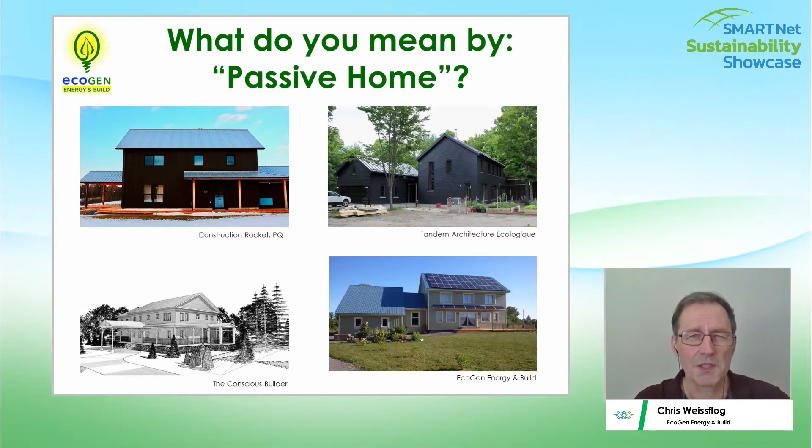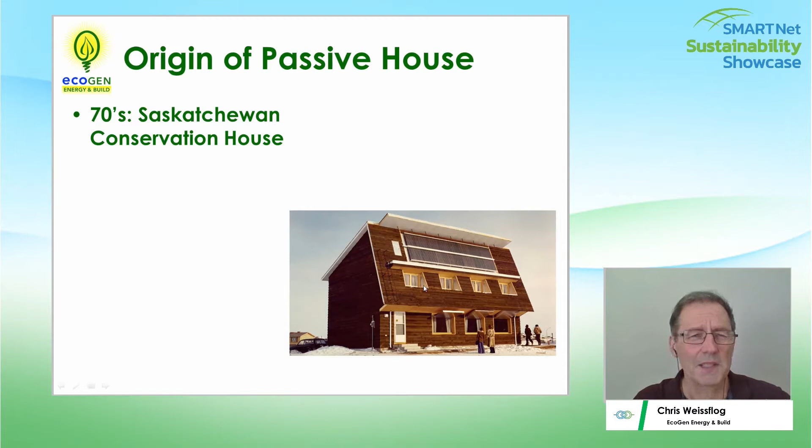Then in the 80s and 90s, Dr. Wolfgang Feist took over, really advanced the concept. He put it into a formula, standards that you had to achieve in terms of energy intensity, how many kilowatt hours of energy per square meter were used or per square foot in order to get through a complete year. So it's all based on an annual basis, as well as instantaneous the demand at a given time.

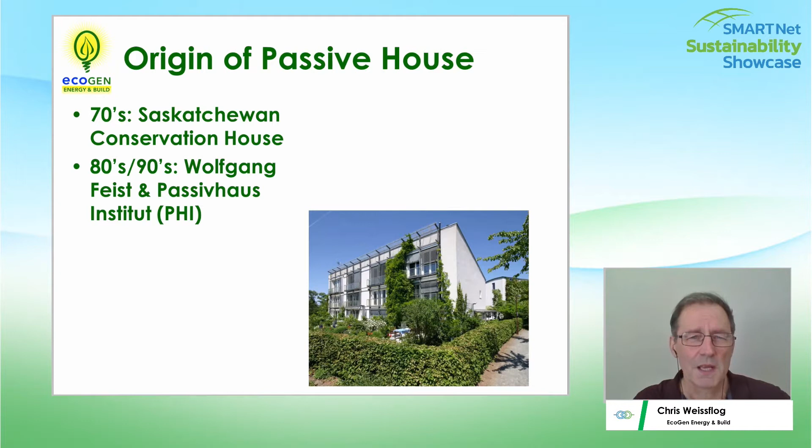So there are a lot of limitations set on it, but the idea was that we can get the amount of energy needed for a house or a building down to a very small amount in order to reduce the amount of energy consumed and reduce the carbon emissions, make our buildings more sustainable from an energy perspective. That concept made its way to North America and got institutionalized in the US via the work that Katrin Klingenberg and a number of other enthusiasts in the US had adopted it and began disseminating the German standard.

Unfortunately, I would say fortunately, they discovered that the standard was difficult to apply cost effectively all across the various climate zones in the United States. We have some really cold climate and dry up in Alaska, and some very hot and humid climates down in, let's say, Florida and Georgia, and everything in between.

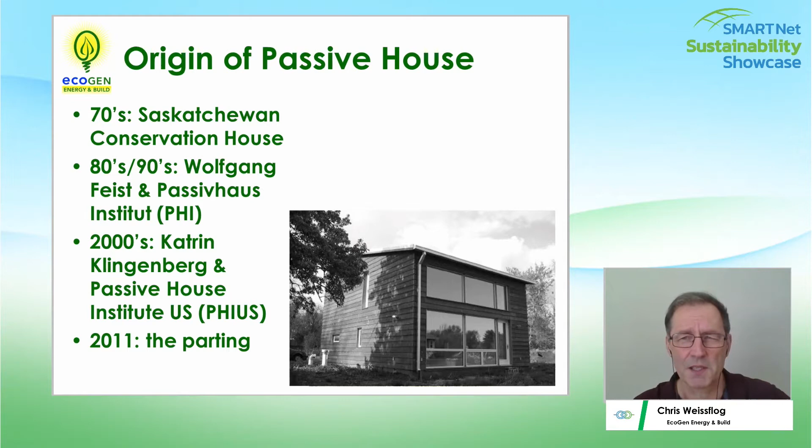So with all the different climate zones, they realized that if you were going to slavishly follow one standard, you might be spending a lot of money on one area when you could be spending it somewhere else, and yet achieving the same amount of energy intensity at the end of the day. So there was a parting of ways. I won't get into it, but what I can tell you is that from a fundamental perspective, they both agree that how you achieve high levels of energy efficiency is like this.

First of all, we got the thermal barrier, that's this insulation, keep the heat in, keep the heat out. Make it really airtight so that air and moisture don't work their way into the walls, but you don't lose air and the heat that goes with it, or the coolness that goes with it if you're in a hot climate. You optimize the amount of sunlight you get during the summer and winter. As you can see here, when the sun is low on the horizon in the winter, we can use the heat. We have good shading, keeps it out in the summertime.

And of course, once you make your envelope really airtight, which you must do in order to prevent the air getting in and out, you bring in lots of fresh air and you recover the heat on the way out by giving the heat to the air coming in with a high efficiency ventilation machine. And lastly, you make up the heat with a small device.

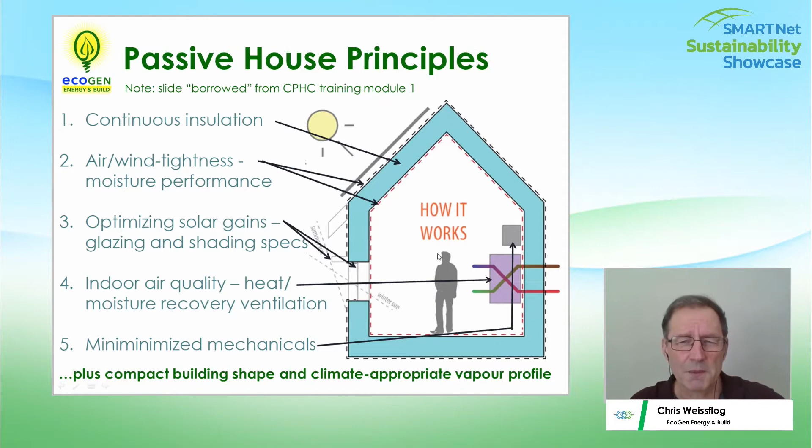And I would tell you that in a case of homes that we've been building, 2,000 square feet, 3,000 square feet, about 2 to 3 hair dryers on the coldest night of the year. That's the amount of heat that we need to keep it going. In fact, we have a hard time finding heat pumps that are small enough.

So what does it look like? Well, you've seen the pictures, but it's not so much what they look like, it's what they feel like that's important. It's all about comfort at the end of the day. And of course, the more efficient you become, the more comfortable they are. And I would say that comfort has a number of dimensions.

In particular, the ones I want to draw attention to are thermal comfort, which of course we're used to because we have wide ranges of temperature here, plus 30 in the summer, minus 30 in the winter time. Yet here I am in short sleeve shirts, and in my house I haven't had the heat on in 2-3 days now. In fact, I'm cooling the house right now and making hot water at the same time. More about that later.

But this is the kind of weather that my house likes. Sunny, because we do have some passive gain, and cold, because then the amount that we're losing heat, we're kind of gaining it up at the same rate. So comfort: thermal comfort, we have humidity comfort, always keeping the humidity in the right range between 40 and 60% relative humidity. Indoor air quality, I mentioned the ventilation systems.

So passive houses, because they have to be well ventilated, bring you fresh air all the time, get rid of the stale, humid, or toxic airs. I wouldn't say toxic, but you know what I mean. Airs you don't want to have in your house. And acoustic: with the thick walls and the right insulation you can achieve a high degree of acoustic comfort here. I'm only 100 feet from the road, and the only thing I hear are the Harleys that drive by and the big transport trucks and the knobbly tires. And even then it's small.

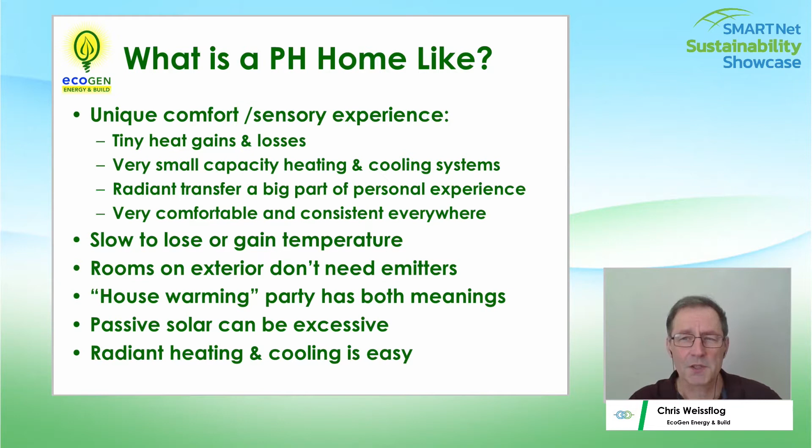And of course, the energy bills that go with that. I'll show you one later, but if your energy bills for heating are about 7.5 cents per square foot per year, a 2,000 square foot home is $150 a winter. If it doubles, even if you're living on a fixed income, that's not a big deal, and it's not likely to double. So there's a lot of comfort in these homes, and what I'd suggest is that you actually get out there and experience them. Kick the tires in the wintertime and in the summertime. Really feel them.

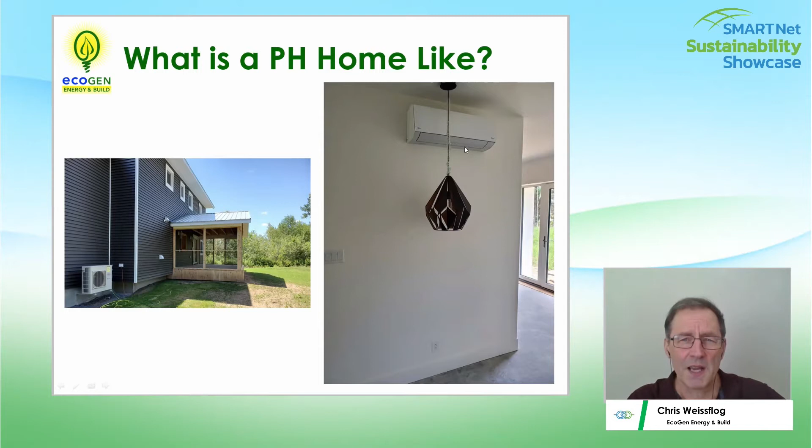So what do they look like, or what do they feel like? Here's some ideas. Talked about heating. Here's a cold climate air source heat pump. This is in one of our 2-story homes. We've got 2 heads on the inside that provide more than enough heating for the house. In fact, this system is oversized by a factor of 2 because it's the smallest thing we could get. Here's the other unit, and each one of these is enough for the whole home, but because there's not a lot of airflow between the floors, we had to have 2.

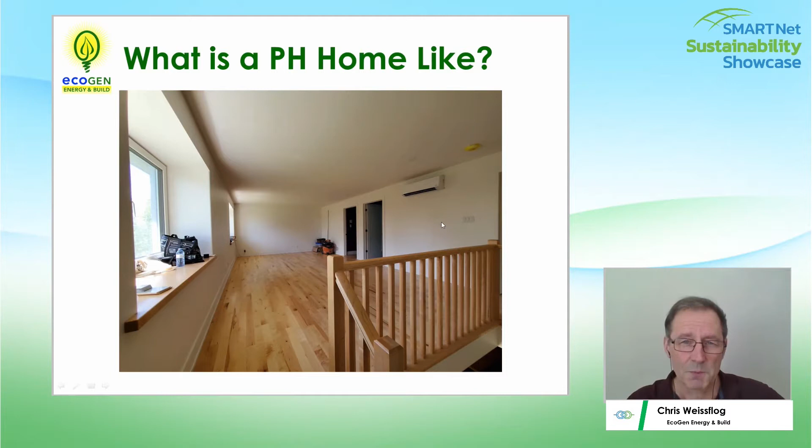Just to give you an idea, homes are so efficient that in the back room here, a bedroom with 2 outside walls, a window, and a ceiling, on the coldest night of the year, the body in that bedroom gives off as much heat as that room loses. Here's another one, a small cold climate air source heat pump with a single head, 2 floors, but because they've got a big open to below area in the middle and a fan, they can mix it up and it can provide enough heating for the whole house. That's a 3/4 ton or 9,000 BTU heating system, and it's more than enough for that house.

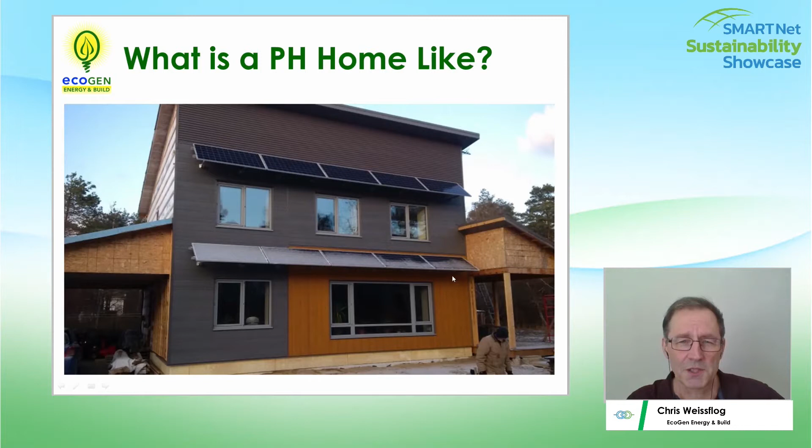And I mentioned how much it might cost to heat. Here is their energy use. In 1 year, they used under $1,200 worth of electricity, 6,000 kilowatt hours, and that's before the panels were connected and generating electricity. They were just being used as shading units. So that's for the year for that house. That's all of the heating, all of the cooling. There's no natural gas, it's only electricity, and it's not grid-tied generating power.

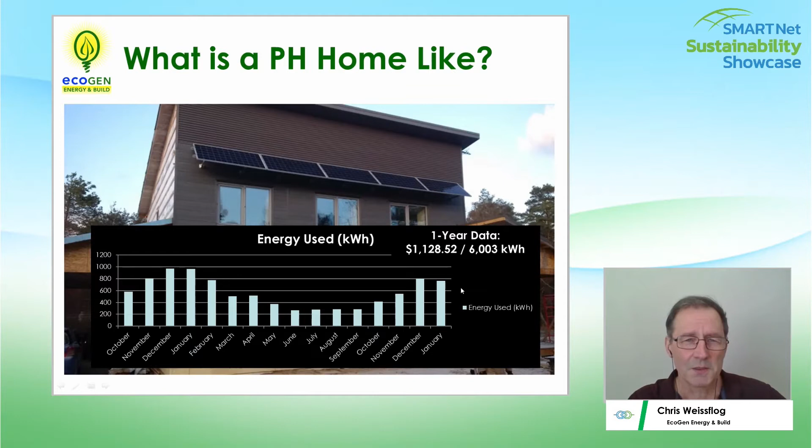So what are the technologies you might find in a passive home? In the process, in the design, there's a lot of technology.

I think I've covered a bit about that and a little bit more. And of course, in the build, there's some technology to ensure that their quality control is being maintained. And Casey's going to be able to tell you a lot more about that as well as a builder.

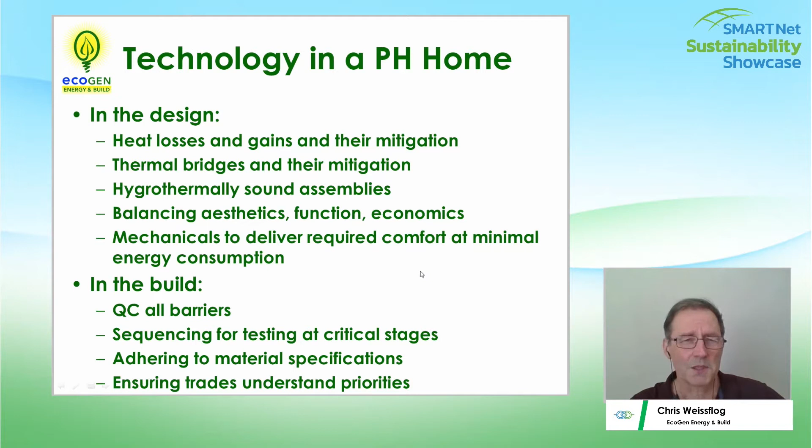So in the design, if you're doing a retrofit, you've got to watch out for thermal bridges. So that's a retrofit case here where we did some assessment of thermal losses through a masonry and concrete floor. And then some insulation. We're looking to see what the temperatures are at junctions to ensure that we're not getting condensation, mold, and mildew occurring.

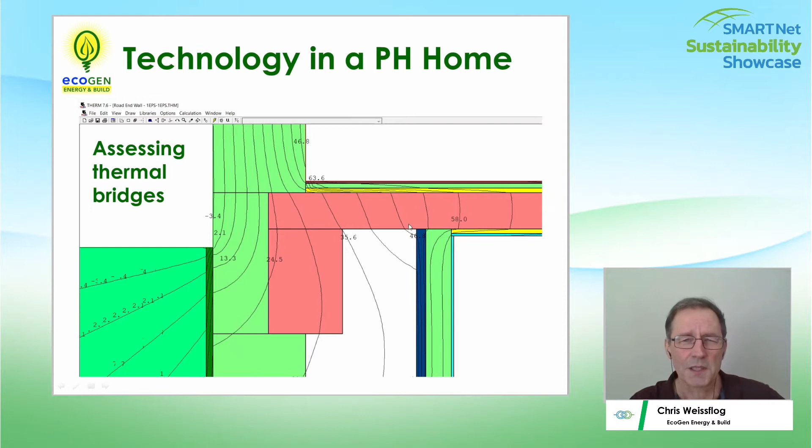But of course, when you're designing new, you don't have to worry about that because you can design out thermal bridges. Here's a case in point, some details of a wall assembly, structural wall, Larsen truss, all dense packed cellulose, proper barriers for vapor, for air tightness, for hygrothermal, which is the analysis of the movement of moisture and air through wall assemblies. Everything done right in this assembly here. No worries from any of those risks that are associated with poorly designed walls.

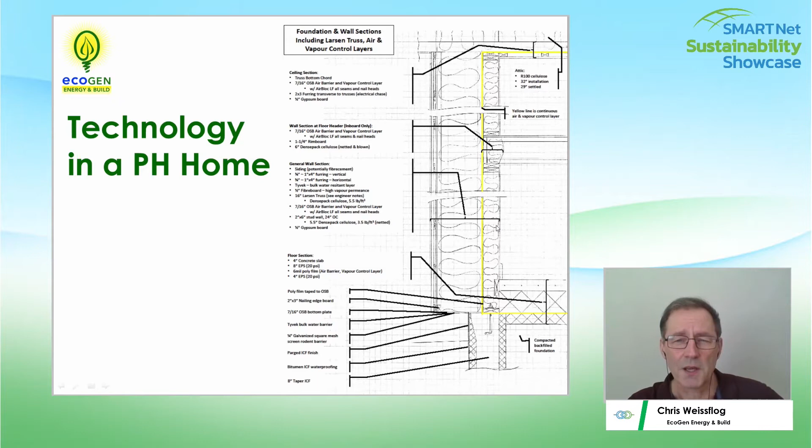And now that is a point to mention. Big assemblies like this with lots of R value can lead to a high degree of risk for mold and mildew. So when it comes to building them, the builder has to pay very close attention to using the right materials and doing it the right way. So air tightness and vapor barriers, all that, and the selection of materials is very important.

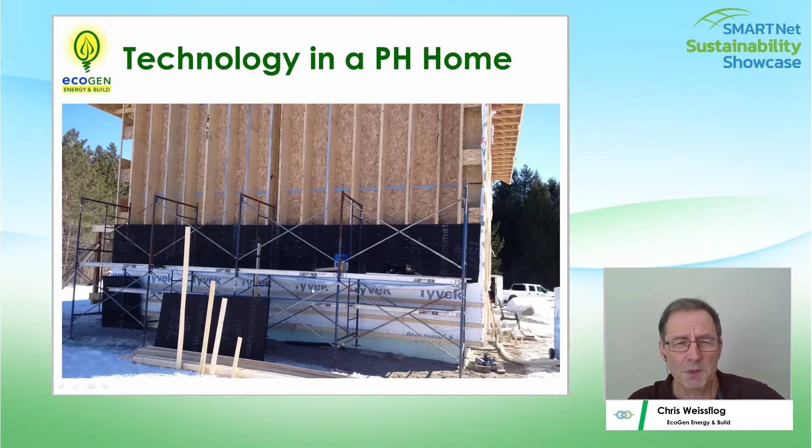We then cover, and you will see this with any design, the exterior surfaces, good for vapor passage, in this case using very vapor permeable materials like the fiberboard and the Tyvek for the bulk water resistance, and dense packed cellulose in this case here.

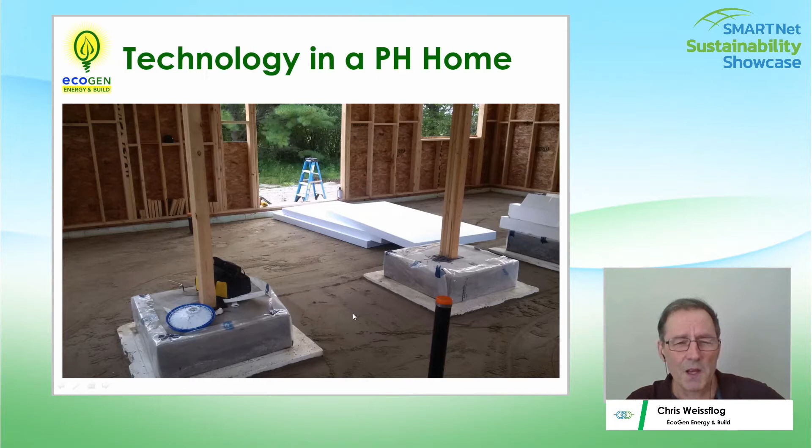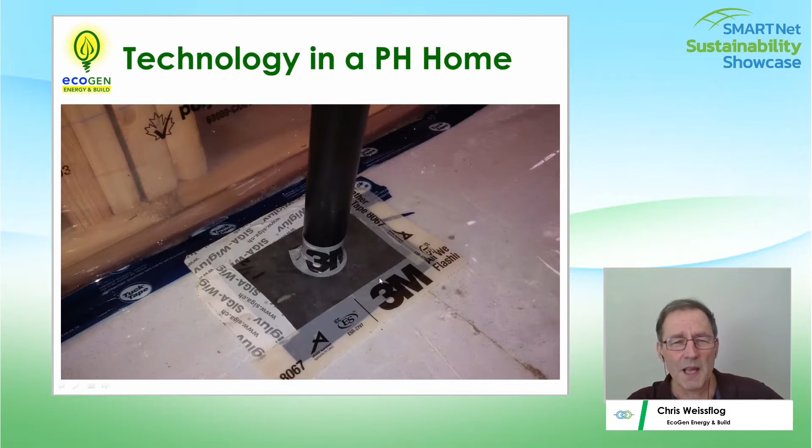On the inside, you've got your structural with your footings for posts to support the upper floors, all on high density foam for load bearing, and our vapor barrier and air barriers coming around that. Again, attention to details, a layer of styrofoam perhaps, and then a barrier sealing off the plumbing under the floor, and then more barriers, of course, and all that's protected by another layer of foam. But you can see how the continuity is really important. All of the barriers are connected, and those would connect to the walls as well.

And for attic hatches, here's an example of an attic hatch plug, because with R100 in the attic, you've got 2.5 feet of insulation, you got a big tunnel, and so you got to plug that and provide some thermal protection. In this case here, a plug with some flanges to prevent air cycling up and down around it, even though the tolerances are fairly tight.

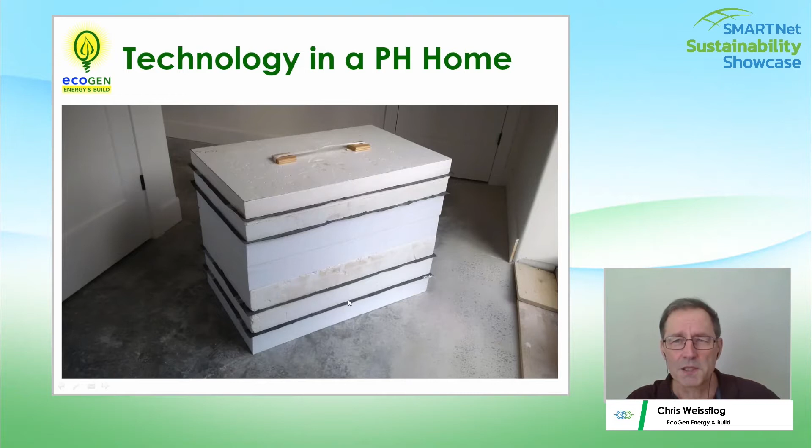And of course, when you're building, you've got things like air testing. Here you've got minus 50 pascals reading for a 2,000 square foot home, 63 cubic feet per minute through the door, which tells us that this house is reaching 0.3 ACH50, and the limit for passive house is 0.6. So this one is twice as good, I guess you would say.

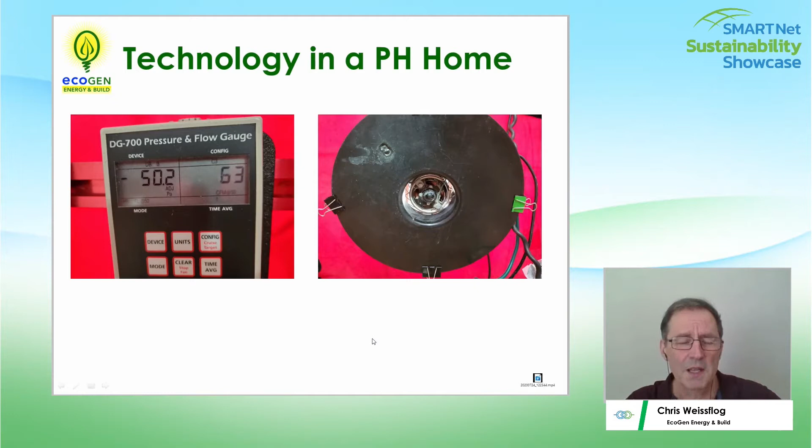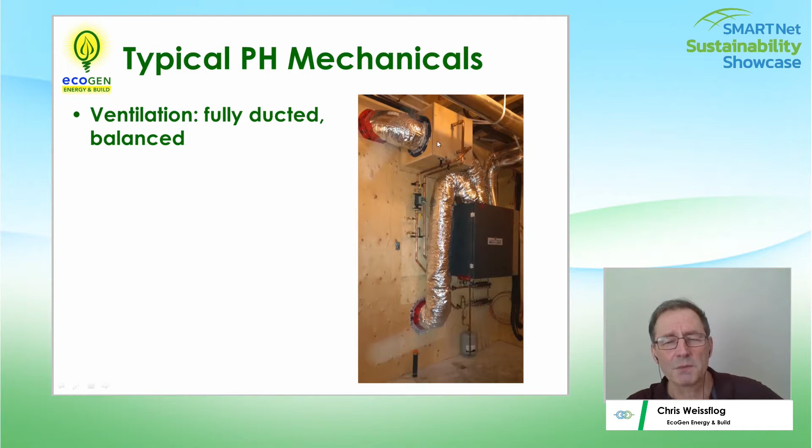And typically in a passive house, you're going to see the high performance ventilators with dedicated ducting, taking air to all the rooms, exhausting air from bathrooms and kitchens and other rooms. In this case here, not standard, but is a ground loop preheating of ventilation air. Here you're seeing again the stuff you've seen earlier, the cold climate air source heat pump.

Here, domestic hot water provided by another heat pump, a heat pump water heater, which takes heat from the home and supplies that heat to the water to heat the water. It's great in the summertime when you can benefit from the cooling, because it cools the air and provides the cold air back to the house. The air's also been dehumidified. So you've got that extra benefit, getting 2 for 1 out of that deal there, and also making your hot water at about 3.5 times more efficiency than using just electric resistance.

So really beneficial, especially in a passive house where the heating season is really short, because you can go a long time into the fall, still be cooling, and even in the wintertime cooling in order to make hot water. And lastly, drain water heat recovery. You're going to see that a lot as well, where the hot water from the shower, the drain water is coming down, and it's being used to preheat the water for the domestic hot water.

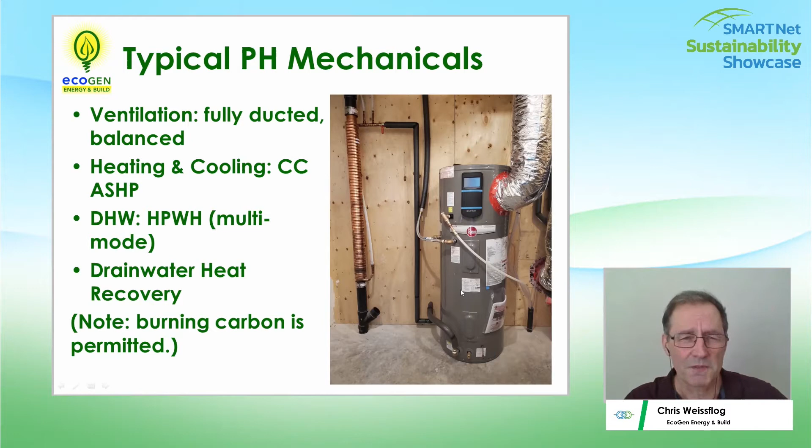So having said that, as I mentioned earlier, using all electric, if you have an opportunity to connect to natural gas, it's not worth it. With a small electric bill like that and the small amount of energy you're using for natural gas, you're not even going to make the savings up on the connection charges for the monthly charges for natural gas. So don't even go there. We can make heat with heat pumps more efficiently than natural gas and more cost effectively.

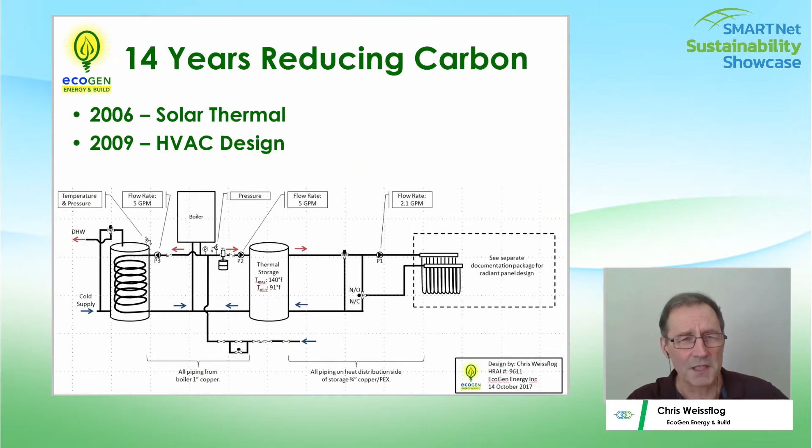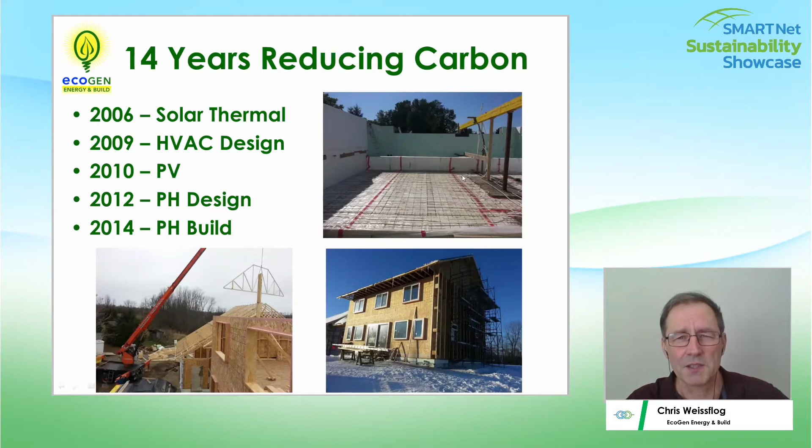So what is it that we do? You've seen quite a lot. You've heard we did solar thermal. We not so much anymore. HVAC design capabilities, PV, off-grid, grid-tied, passive house design, and 2014 got into passive house building. And here you see basements, a lot of things going on that we've done.

Our approach has always been on sustainability. So when we started off, we selected materials and designed everything around an approach that used sustainable materials. So we're using cellulose above grade for insulation, wood as much as possible because that's embodied carbon, and that's embedded carbon rather. And of course, try to make it local and affordable as much as possible. And so all of our assemblies were designed around skill sets that were readily available, just required minor tweaking.

And lastly, affordable. Key thing here is that if there is a small premium associated with building to the passive house level, the energy savings and the savings on your energy bill, when you put them against your mortgage, more than makes up for the difference. So when people ask me, what's the payback period, and I tell them that there isn't one, it's immediate, often they don't get it. But if you think of it as building a code home or a passive home, pay a little bit more here, but roll them all into mortgage monthly bills, and you're equal, and right away out the door, you're on an equal footing, but in a better house.

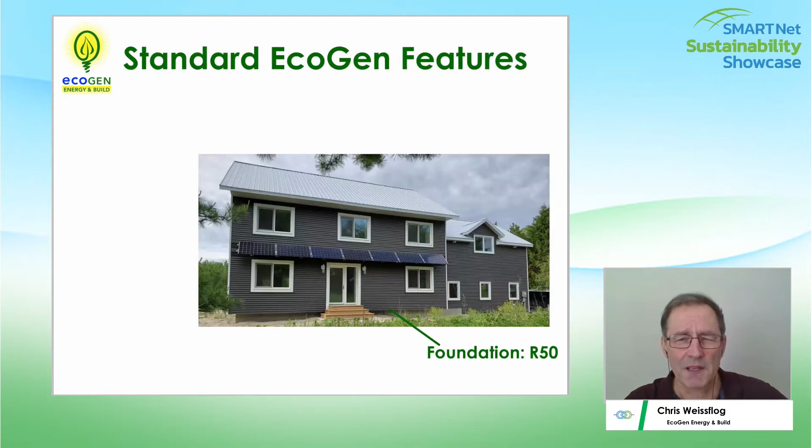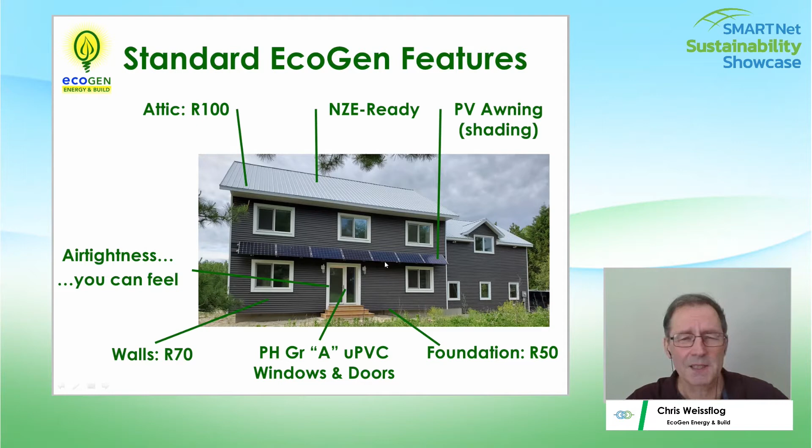So having said that, what's it look like? Here, typically our foundations are R50, our walls are R70, our attics are R100. We're using PV shading wherever possible to give us shading on the lower floor windows and our eaves on the upper floor windows. We're using high performance uPVC windows and doors, and we're building them all net zero ready with reinforced roofs, and all the conduits and everything in the right place to make it easy, plus gang planks or catwalks in the attic over top of all the insulation. And lastly, when you open the doors, you can feel the air tightness.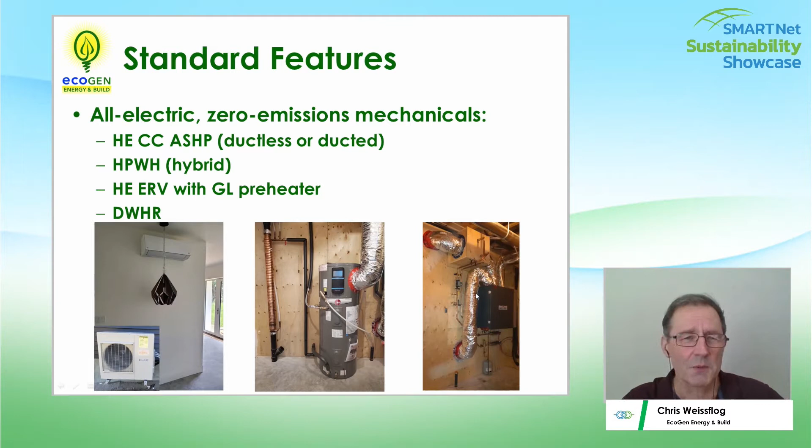So standard are the cold climate air source heat pumps, the heat pump water heaters, the drain water heat recovery. We can and have been doing the ground loop preheating of the ventilation air, which gives us a warmer air when we supply it to the rooms.

And of course, one of the things that we found very beneficial is that with a house that's so efficient and requires so little energy to run, for the extra $1,000 for an extra load center or breaker box with a transfer switch for a generator and a generator connection on the outside of the house, you can plug in an 8 or 10 kilowatt generator and have everything that's essential: your heating, your hot water, your well pump, your ventilation system, your lights, your internet these days. Anyway, it's not a big expense, and you burn a little bit of carbon, yes, but that's when hydro isn't providing for you.

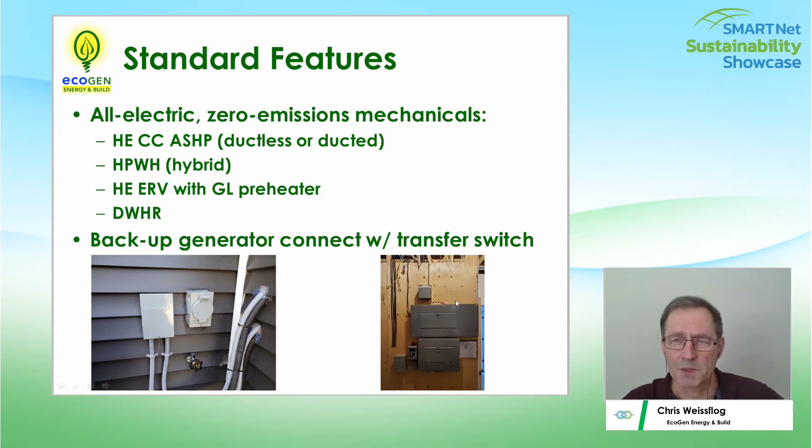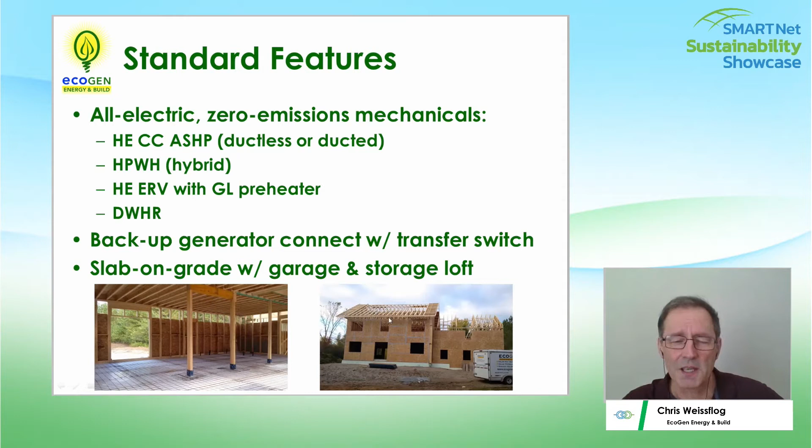And then lastly, of course, we're doing typically slab on grade and uninsulated garages with a loft for storage, because all of the area inside the insulated house is high premium, and you want to have a little space for your spillover. And a lot of things can be stored in a garage. About 95% of our things do not need to be heated. And lastly, entry level might be vinyl and aluminum trims, but we are doing a lot of fiber cement as well.

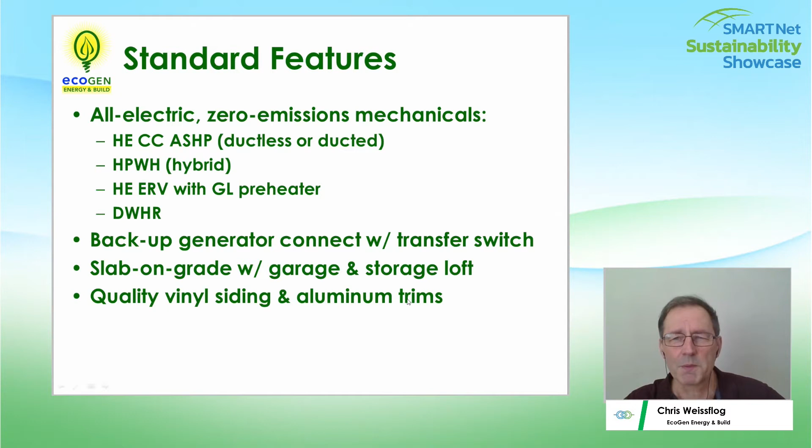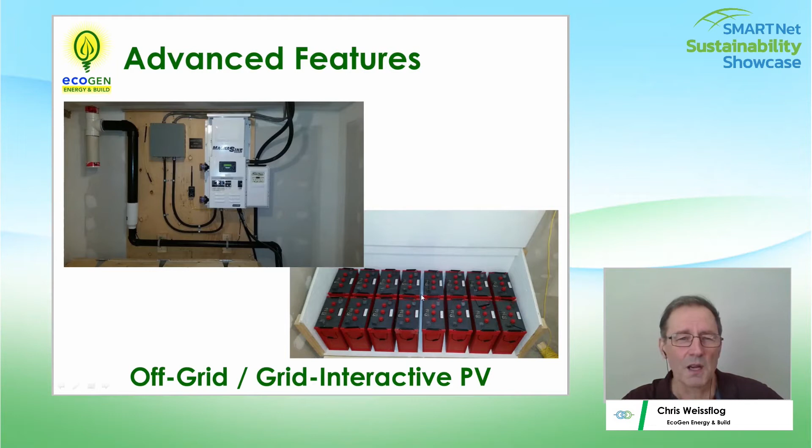Or steel, and some nice sidings as well here. So advanced features: the awnings, the grid tie, a little bit of extras here, grid interactive or off-grid systems. Those are all things that we can do and have done. We've done some radiant floor, we've done basements, we've designed in greenhouses.

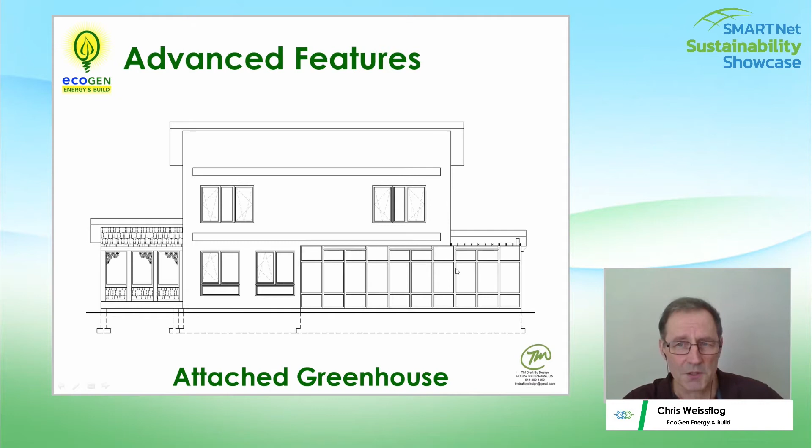Didn't go forward with this, but the key thing about greenhouses is understanding that space where they're connected to the house, because those walls have to respect the hygrothermal dynamics of the greenhouse as well as the house and not deteriorate. So some advanced features there. Also root cellars integrated in, cisterns integrated in, storage, masonry heaters integrated in.

Two things here: air tightness and thermally overwhelming the house. Did a lot of work on this. It is doable with some caveats. However, again, this is a case of what the client wants. You do your best, and in this case here, it was doable with some caveats, but we were able to respect the air tightness, I believe, or would have been able to.

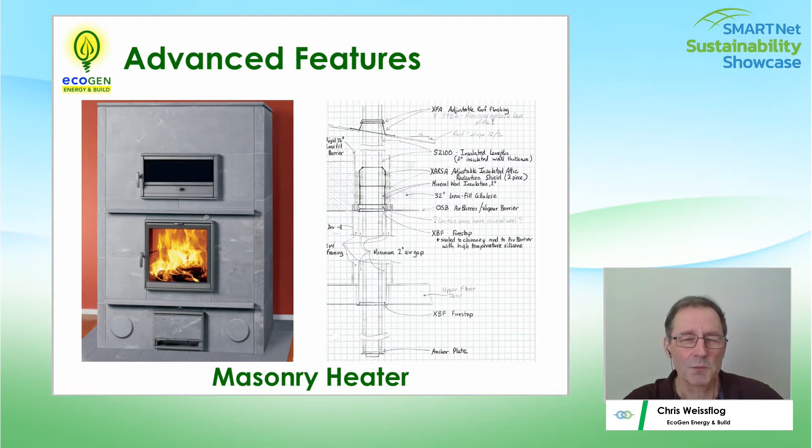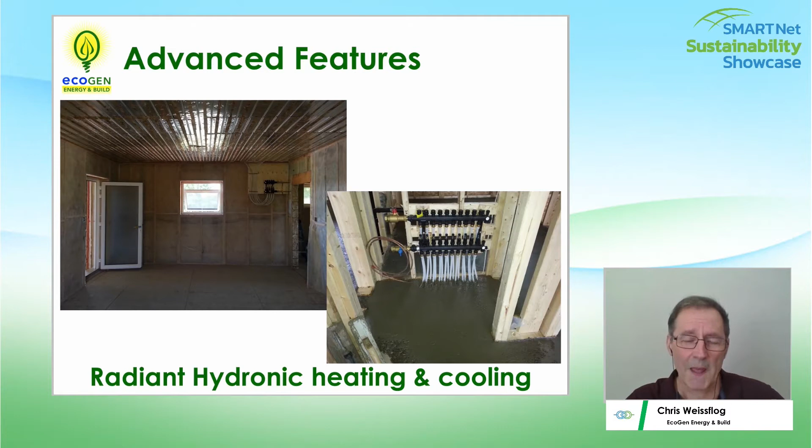Hydronics, interesting. Join me at 4, I'll tell you more about this. My place, I use a ground loop without the heat pump. I can cool my house using just the hydronics. $14 of electricity per summer. Keep my house closed down for 4 months, 21 Celsius all summer. And that's just using ground loops and hydronics.

Thermal energy storage, large reservoirs built in, an advanced heat pump system that does everything: making hot water, cooling the house, dehumidifying, heating the house, getting rid of heat, everything. Anyway, that's a subject of study, a PhD student at Carleton University, as well as we're in our 3rd year running with some undergrads.

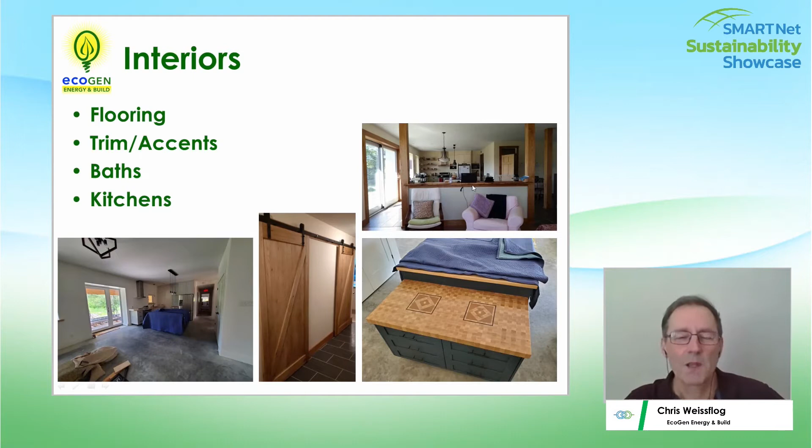And lastly, lest you think we're only technical, we also, of course, do all the niceties here. You see a bit avant-garde. We've got some concrete floor going on, got some really nice cabinetry with a close association with a custom cabinet worker, some more traditional looking materials here and here, indoor finishes with wood. Love that sort of stuff.

If you join me at 4, we can talk a bit about this, which is the challenges of bringing Passive House to the community. Largely, I'm talking about the lack of support from a lot of very mainstream engineering, very mainstream building departments. We're pushing the limits and trying to work with them. I mean, we have a lot to learn, and they've got their jobs to do, and they've got a lot of people who are cutting corners, and here we are trying to build up the corners. So it's a very interesting experience. More about that at 4.

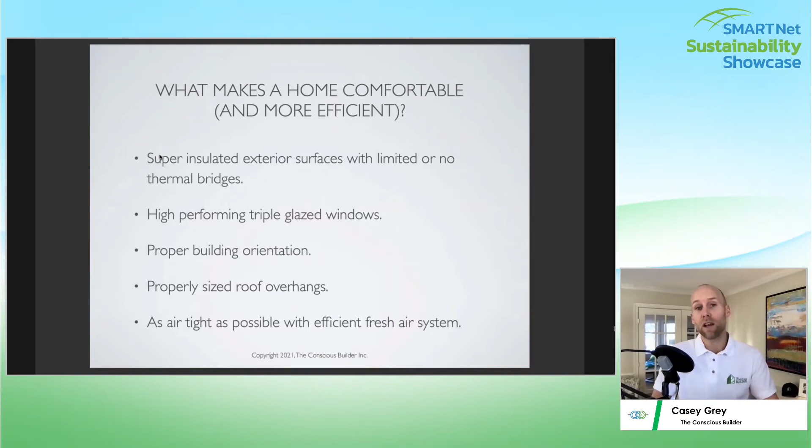So the thing that I really want to focus on in terms of comfort is air sealing. And the easiest way to explain how important air sealing is, think of today. If you're in Ottawa right now, it's cold out. The last couple of days have been cold. You wouldn't go outside without zipping up your jacket. That is essentially what air sealing is on your home. You want to zip up that jacket.

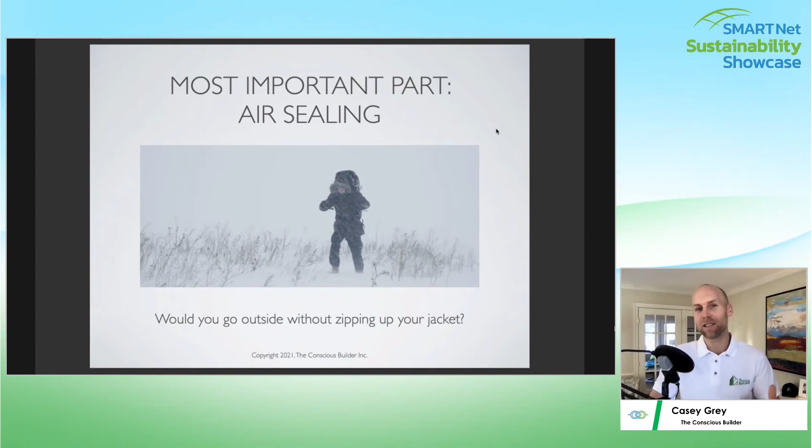It doesn't matter how thick your jacket is, how much insulation you have in your walls. If you don't have that windbreaker zipped up tight, all that wind's just going to flow through, and it doesn't even matter. It might slow it down a little bit, but if you don't believe me, go outside right now, stand towards the wind, open up your jacket, and let me know if you're warm or not, and whether or not that jacket's helping. This is the best analogy we can give when it comes to air sealing.

And then the other thing that often comes up when I talk about air sealing is, well, what about the home, doesn't it need to breathe? And my answer is yes, it does need to breathe. But here's another analogy. How do you personally breathe? You breathe through your lungs, right? You don't breathe through your skin. So you breathe in through your nose, your mouth, and technically you breathe through your nose. It kind of filters the air, preconditions the air before it gets into your lungs, and then you breathe out the bad stuff. That's what you want your home to do.

You don't want to be able to breathe through your skin, but you do want to perspire through your skin. In the case of a home, you want to make sure that if there's any vapor in your walls, it can travel through, right? That's what in construction we talk about as permeability. So we want to allow that vapor to travel freely through it, but not the air. We want our skin, our envelope, to be airtight, and then we want to control the air that comes in and out of the building.

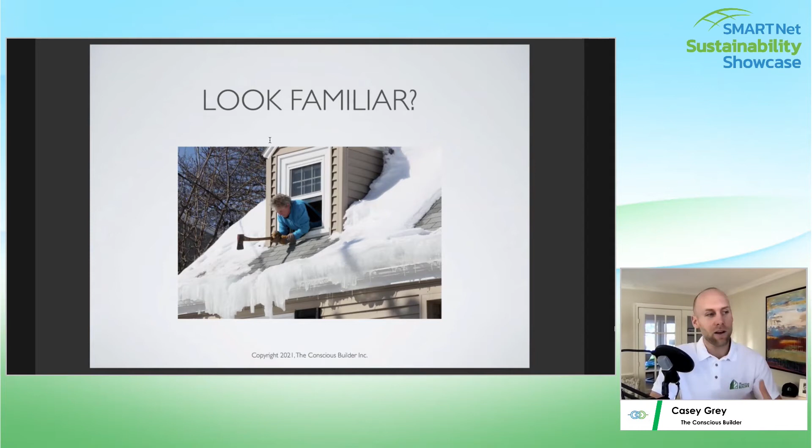And when it comes to these problems, I'm sure you've seen, especially on old houses, this probably looks fairly familiar. Hopefully you're not out there with an axe trying to chip the ice off of your roof, but the cause of this isn't necessarily insulation. It's usually because of air leakage. And there's lots of ways that air can leak out of a house, but I'll get into the difference between vapor barriers and air barriers as well.

So an air barrier, if you look at the code, it's actually required for an air barrier to be continuous as per the Ontario Building Code. In theory, that makes sense. In reality, that's actually impossible and has never been done to my knowledge, because if you had a completely 100% continuous air barrier, you would have an air change per hour, ACH, which Chris talked a lot about on his presentation, of 0. That would mean that you wouldn't have anything going through your wall, but that's not possible.

Well, hopefully it will be possible one day for homes, but for the most part, if you're getting low, like below passive house levels of 0.6, that's extremely airtight. That is a really good target. Chris mentioned 0.3 on his own. That's amazing. That is what we're aiming for.

The vapor barrier, however, does not need to be continuous. And why I think there's a big confusion with this is the way most people build and renovate homes right now, they use the 6 mil poly, which is on the inside of the studs typically. So most people understand that there's a 2x6 wall and you have some insulation in there, and then you have some poly and then your drywall. That poly is used as an air barrier and a vapor barrier, but people have been calling it a vapor barrier forever. There's technically 3 barriers to a home: a weather barrier, a vapor barrier, and an air barrier.

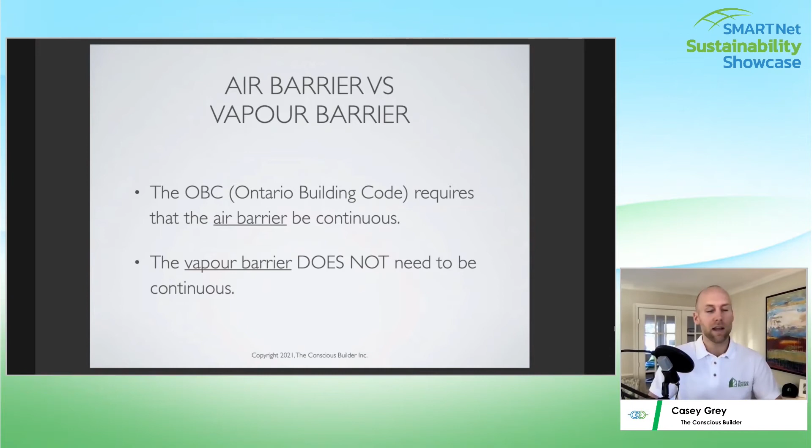The air barrier can be with the weather barrier or the vapor barrier, but it could also be separate. So the vapor barrier has to be on the inside. Weather barrier obviously has to be on the outside. The air barrier can go anywhere in that wall assembly. And that's why there's a bunch of different ways to do this, and what's important to understand, especially when we get into renovations.

So how do we make this work with old houses, right? There's a lot of old houses. The reason I wanted to focus on renovations as well is because there's a lot more homes that need to be renovated than homes that need to be built, right? There are always going to be more older homes on the market because there's only so many new homes that we can build and only so many new homes that we need every year, but the old homes will always be continuing to rise.

So I want to share a little bit of a project that we recently just started. I don't really have any finished pictures yet, but this is a home that we're going to be renovating. This is a stone home built in 1860 that is probably the leakiest house we've ever tested. This came in at an air test of 11.7 ACH, which is wild.

I know those numbers might not make sense to some people if you don't understand air changes per hour, but essentially, if you were to break that down into the size of a hole in one space, I think there was 680 square inches or something like that. And basically, a hole that big is what it would equate to in this house of air leakage. But what we're aiming for now is, obviously they hired us because they want to improve the comfort. And this is an old stone home. We don't want to do anything from the outside, so we're doing a lot of work from the inside.

And as part of that, I'll share some numbers that we have, but right now they technically need about a 143,000 BTU furnace to heat this home. By the time we're done, we're hoping to get it down to 50,000 BTUs or less, which will be significantly less. More if we can. It kind of depends. It's a budget game as well when we do renovations. You know, where do we focus some of the efforts, and sometimes we can do it in phases.

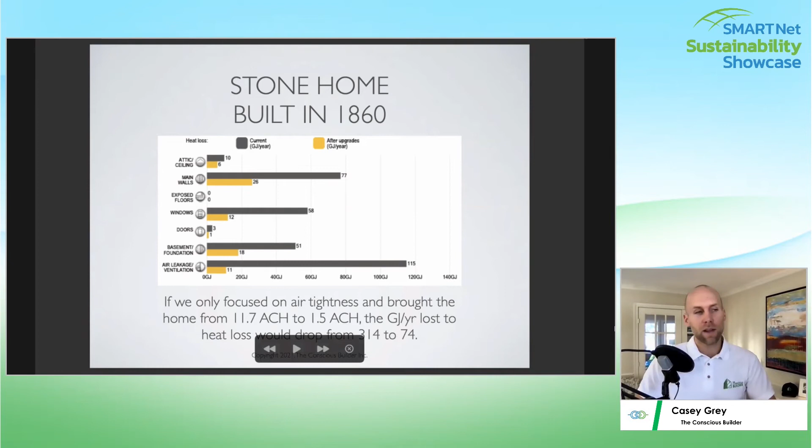We did an ICF passive home for another Chris Straka of our design, and he's almost right on the road where they're digging tunnels, and there's dump trucks driving by, and you can't even hear the dump trucks when they come beside his house. It's wild. But that's partly insulation, but also airtightness.

Now, in this same home, if we go to the overall energy consumption, once again only focusing on air tightness, we could reduce it from 367 gigajoules per year. So this is all of the energy for the entire home, down to 65, which would give us a savings of about 82%. Once again, air tightness only.

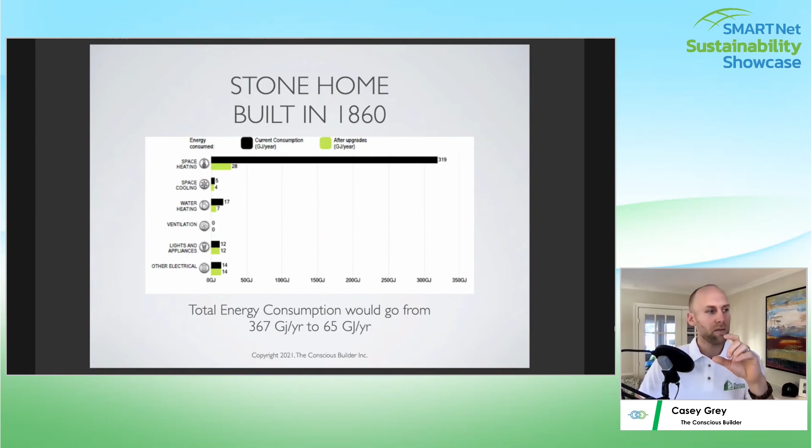Now, the reason why this is different from the other one is that one is strictly focusing on heat loss. This will take everything else into consideration. There's going to be air conditioning as well. So the way we're going to do it in this house, I can go back to the picture. These walls are about 2 feet thick, stone right through. We are going to do an air barrier on the inside.

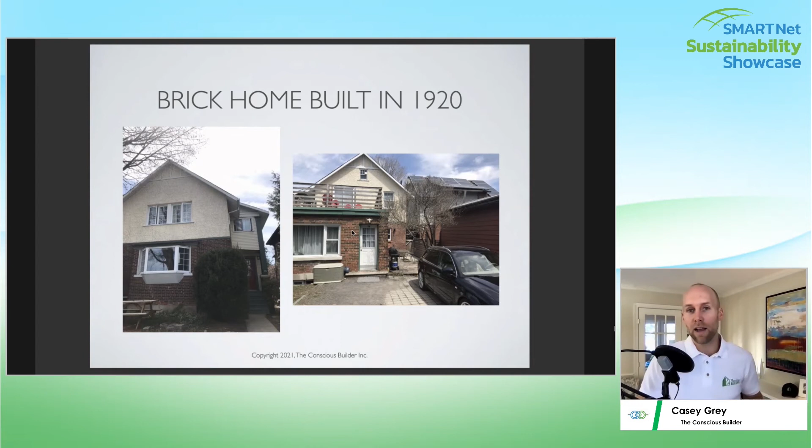So in this case, we've actually decided to go on the outside and essentially take that whole jacket concept that I talked about at the beginning and wrap the whole house. So here you can get an idea of what we've had to do. It's been some interesting framing. I'll show another picture, but everything had to be foam over the roof. We decided to spray foam the walls.

Foam is obviously not the greatest for the environment, but for this project it was partly on cost, but partly on the strength that we wanted, because a lot of the brick was falling apart. By spray foaming everything together, it was actually going to hold everything together, and the homeowner felt a lot better about that.

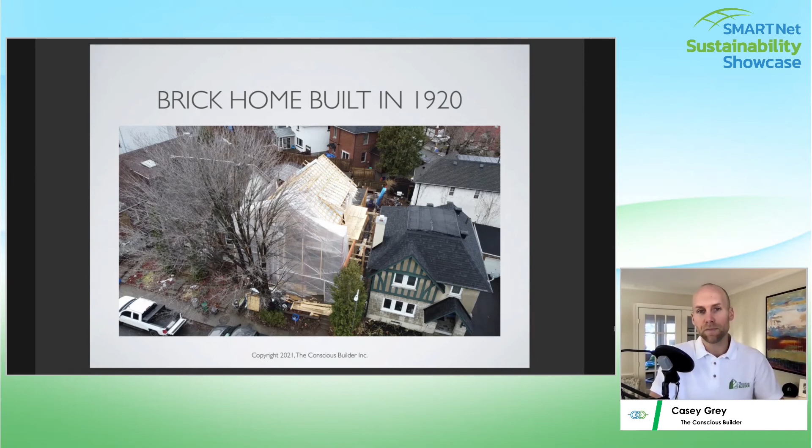And this is a shot from above. You can see how we had to frame and actually level the roof because the roof had a big dip in it. So you can't tell from this angle, but if you were to stand at one end and look down the other, there was probably about a 4-inch dip as the roof was pretty much waving at us. And the guys did an amazing job, got all the insulation on there.

I believe, if I remember correctly, we have about 6 inches of XPS up there, and then it's all taped and sealed. So this is going to be our air barrier as well. So we've taken the air barrier and we've put it on the outside with the weather barrier.

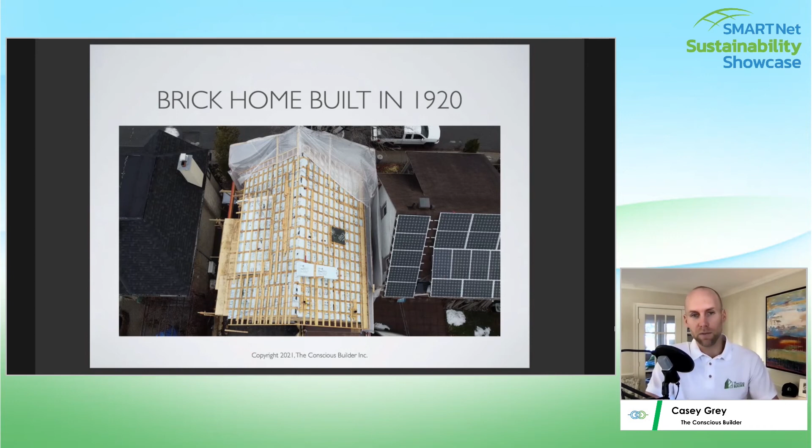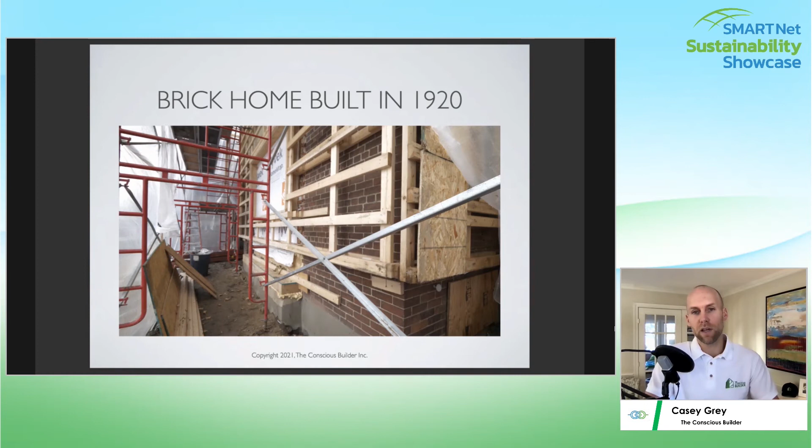This gives you an idea of how we've had to frame it. So this is the front window, which was removed, and then everything had to be strapped out and nice and plumb as best as we could in this case. And the spray foam was going in between that. That gives you an idea of what happened after. And that's why we had to tarp it too, because we get into colder weather. So we need to make sure that we had some heat in there in order to make sure the foam would cure properly.

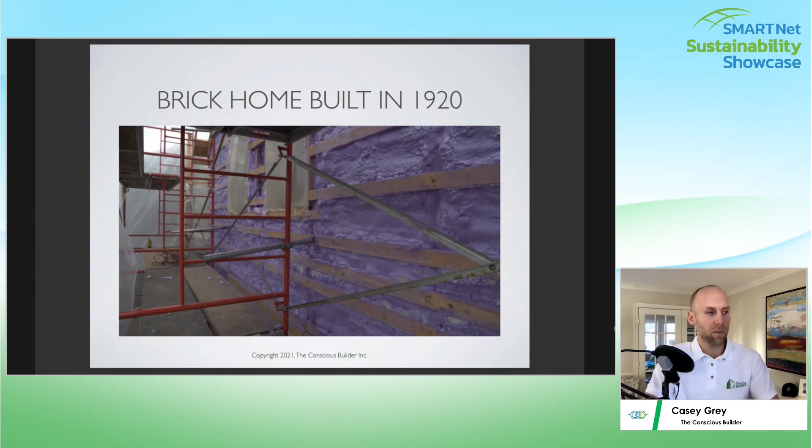And this is basically where we're at at this point. We're actually a little bit further. This is the back of the house. You can see the steel roof is on now, and that blue tarp you see at the bottom of the image is actually that old addition that I was talking about that was put in in the 1940s. We just started to renovate this portion, and these big beams that you see are now put in place. That was all put in on Friday. So it's moving along nicely.

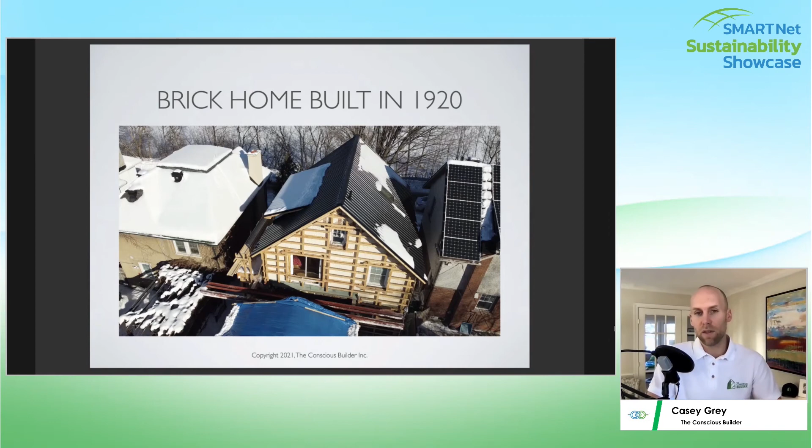And the trickier thing with this one is that, well, they're a little bit different. So this one, because we're tackling it from the outside, the homeowner's been doing a lot of the work inside himself. They've been living in the house the whole time. The other home where we're doing it from the inside, we're gutting it. So they've had to move out for 6 months. And that's the only way we could do it. There's no other way that we could renovate the inside of that house. We had asbestos to deal with there as well, which I believe we did here as well. So that's common in a lot of these older houses.

Now, the other thing that makes a house airtight is the windows and doors. And, just pulling out my other notes here. You don't have to go out and get passive certified windows and doors necessarily. Like, that is often a requirement for getting a certified passive. Not necessarily, you take a hit on the modeling, but you do need to understand what makes a good window, because windows will range widely in prices.

We got quotes for our passive, I think they ranged from $70,000 to $140,000 at the time, and we probably could have gone higher, but that gives you an idea of how much the windows and doors can be. A lot of the European certified passive house windows with tilt and turns, they can get extremely pricey.

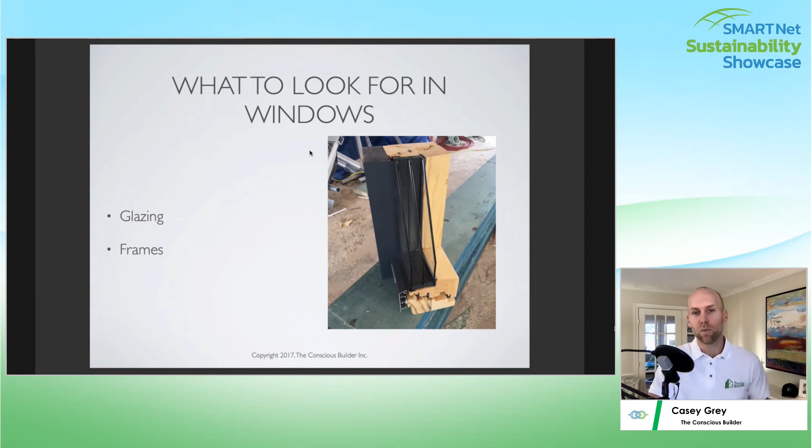That's exactly what you're looking at here. This is an expensive European style window, but you can see the seals that it has and how much attention to detail there is. Now, aluminum clad wood windows are probably some of the most expensive windows that you're going to be able to buy, but you can get a good performing window made out of PVC if you're okay with PVC. On the cost effective side of things, we've done a lot of windows with North Star. They perform well. We haven't had any issue with them.

Obviously, service is a big thing for us when it comes to working with products. So we want to make sure whoever we're buying from, if or when there is an issue, that we can get good service. And not a lot of these companies have the service available within Ottawa. If you're ordering overseas, who's going to service that if something were to happen? That's always the tricky part in our position as a builder, as nice as some of these products are.

But to understand a window, when we're talking triple glazing, the glazing is going to be the glass, whereas the coatings will be like the low E coatings that would be on the inside of the glass. And the spacers in between, what you want is super spacers. So you don't want aluminum spacers. You don't want an aluminum frame that goes all the way through. You can have aluminum clad on the outside. Sometimes we get into commercial windows for strength, and it's going to be aluminum. That's going to affect comfort when you're standing close to that window. You just need to understand.

So a big thing for comfort is you want to feel warm, right? You want to feel comfortable. And if you've ever stood by an old window, even if it's just double glazed PVC, probably on a day like today, it would feel like there was a breeze there, but you wouldn't actually have a breeze. It's just the convection current. The glass is getting so cold and it's hitting the warm air, and it's creating this convection current, and it feels like your window is leaking. If you change that to a decent triple glazed window, that would be eliminated for the most part. Maybe not completely, but it'll be a lot better than the double glaze.

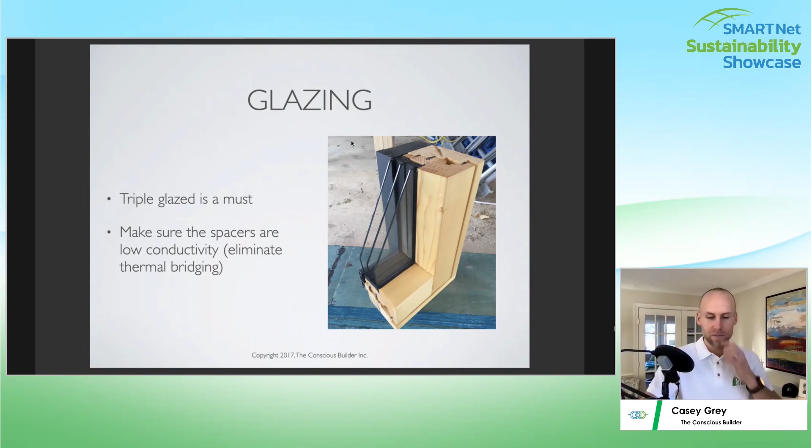This gives you another idea of seal. So if you have a window that's open, you want to make sure that it's going to be able to seal properly, because the windows and doors of your home are essentially the weakest point of your wall assembly, of your envelope. So you want to make sure that they're sealed properly. And you can see in this picture, they've obviously put a lot of attention to detail into their seals.

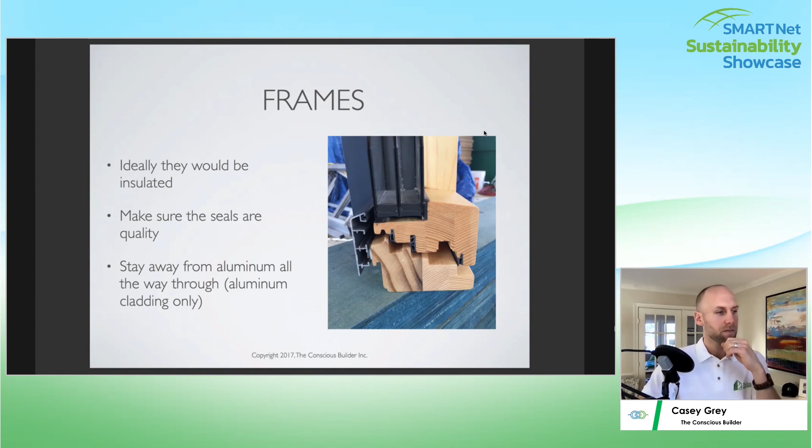Now, the last thing I really want to discuss is, okay, what happens? Now you've made my house airtight. Now my house can't breathe. How do I get fresh air into that building? This is the ERV or HRV that Chris had mentioned before as well. Now, a lot of HVAC companies will say that you can't use ERVs in our climate. That is not true. You can use ERVs in our climate, and they're actually better.

Most people think it stands for energy recovery ventilator. It actually stands for enthalpy recovery ventilator. Enthalpy is the transfer of moisture. And that is what we actually want, because we have cold, dry winters, and we have hot, humid summers. So we don't want that moisture to be coming into our houses when we don't want it.

So all the North American companies are now making ERVs. And that would be what we would recommend, because you can control humidity with it, but you won't necessarily be getting rid of the humidity that you want or taking on humidity that you don't want. Whereas an HRV will do that, because you can't transfer any humidity through the core.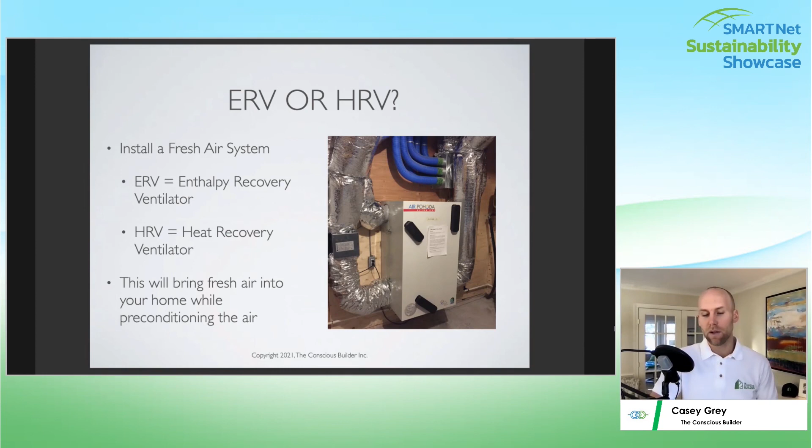And to give you an idea of how much heat loss you could have in a home, a lot of people love these big range hoods, right? Or even a bathroom fan. When you have a properly installed ERV system, that's a completely dedicated system, you can get rid of all of your exhaust. You don't need bathroom fans. You don't need a kitchen range hood unless you have a gas stove, because then you need it for code. But we get into other issues if your house is too airtight with fuel burning appliances. We won't get into that right now.

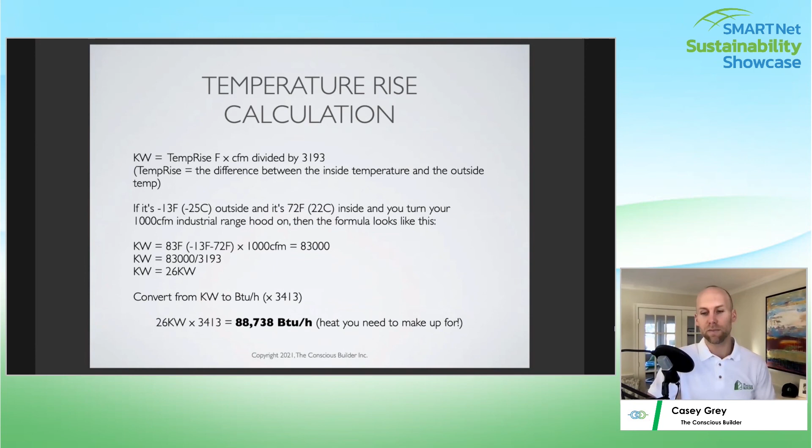Once again, it's all about air tightness. So in summary, air tightness is the most important part of a comfortable home, in my opinion. But you need to understand the difference between an air barrier and a vapor barrier. And if you're working with a contractor, make sure that they understand the difference between those different barriers.

Make sure your home can sweat, so to speak, but this is the permeability, right? When you get into thicker walls, you want to make sure that you can get rid of moisture that will inevitably end up inside of that wall. And then you want to make sure that your home can breathe through a set of lungs, which is an ERV, but not through the skin, which is the envelope, which is what we talked about.